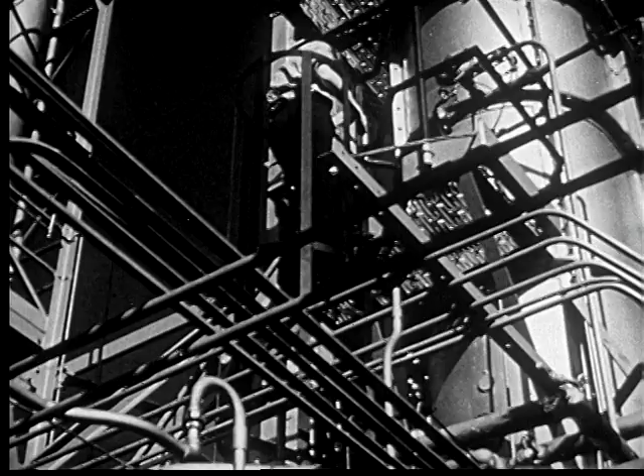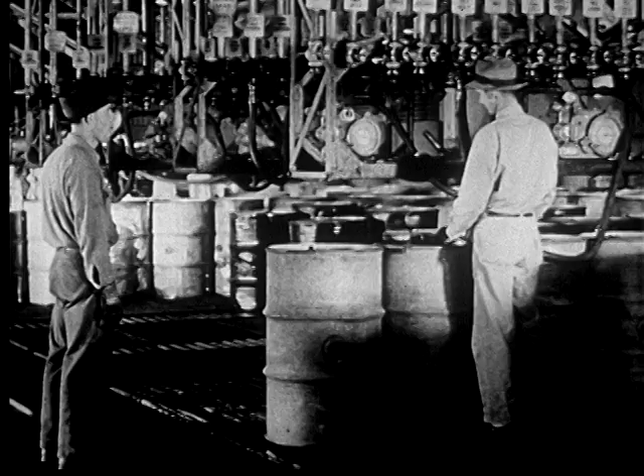Gasoline. Powerful stuff. Modern magic. Our lives, our business, our cities are patterned on motor transportation which gasoline has made possible.

Do you realize what gasoline means to this country? It has added a new freedom to our lives, the freedom of movement, of individual transportation, anywhere, anytime, for everybody in America.

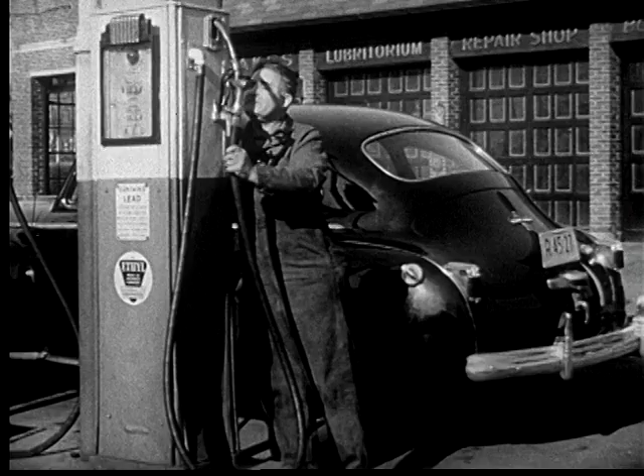And those who make and sell gasoline perform a service, not only to their communities, but to the whole country. But most people just don't realize how much hard work, knowledge, and money it takes before gasoline can come out of a pump and into the tank of an automobile.

First, there is the search to find the crude oil that's needed to make gasoline, and that takes plenty of study and special training. They send out crews to make surveys of territories that seem promising, just like prospecting for gold in the old days. Only these men are scientists.

They sink test holes and use super-sensitive instruments to find out what the Earth is like far below the surface. If the experts decide the results show the possibility of oil, they are ready for the next step.

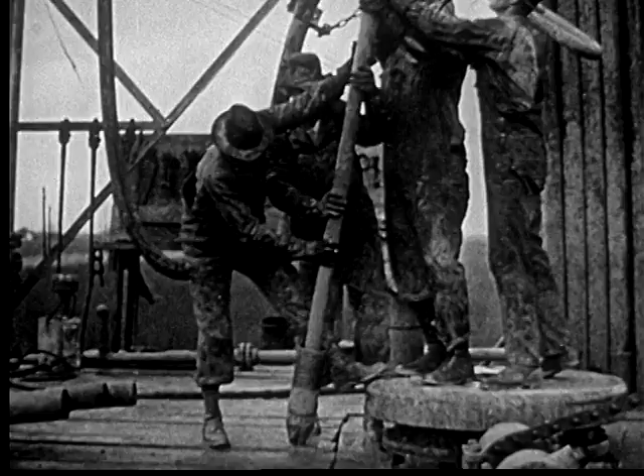Usually, they first drill a hole to get actual samples of the Earth itself, cores that show exactly what the Earth is like at different levels. The oil engineers can tell if these samples come from a place that contains crude oil, how good it is, and how much there is.

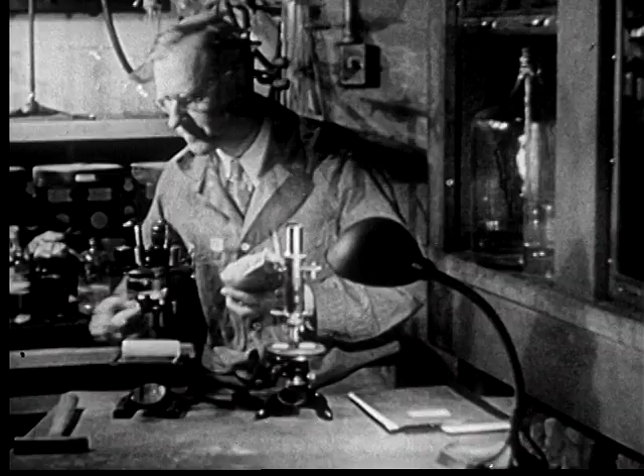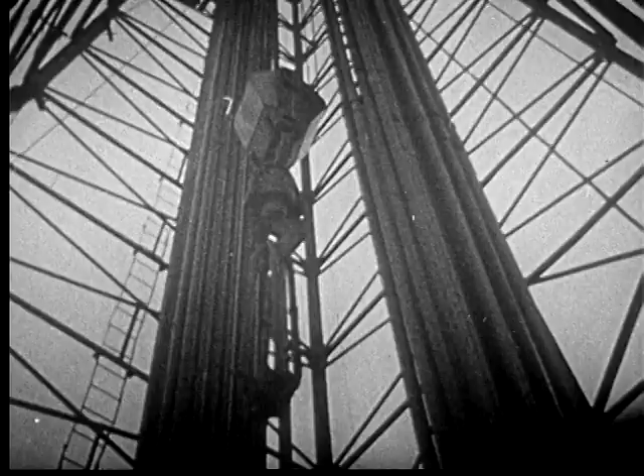Then another big, tough, expensive job gets underway. Clearing the land for drilling, maybe even building roads through wild, rough country. Oil drilling goes on all the time. Thousands of new wells are drilled every year. And because of the scientific way they go about it today, over half of these new wells deliver oil.

Next, there's the job of getting this crude oil from the wells to the refineries. A lot of it travels through pipes, thousands of miles of pipes. Some pipelines extend halfway across the country. And plenty of crude oil is carried in tankers.

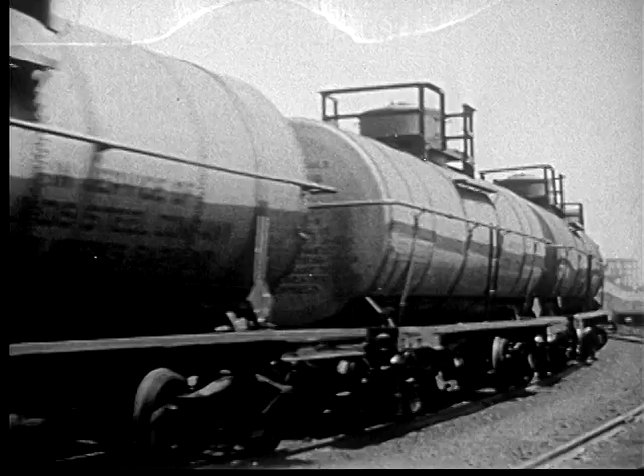They also transport finished gasoline to every part of the world. These tankers form one of the biggest merchant fleets we have. And the railroads carry oil from the gathering tanks to the refineries, and then gasoline from the refineries to distribution points all over America.

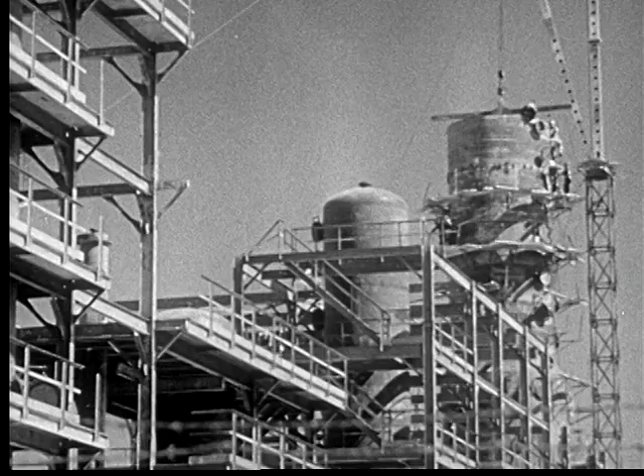The process of refining crude oil into gasoline and other products is another big part of a big industry. It takes millions and millions of dollars worth of equipment to turn out finished petroleum products.

It's a complicated process, but not at all difficult to understand when you realize that every drop of crude oil is a mixture of many small particles or molecules. They're called hydrocarbons because they are compounds containing only hydrogen and carbon. The molecules vary in relative size and weight.

The large, heavy molecules are found in the heavier oils, the fuel oils, lubricating oils, tar, asphalt, and so on. In what you might call the medium sizes, you find smaller and lighter molecules. And these are what are used for gasoline and kerosene and similar products. The very small and very light molecules are the natural gases.

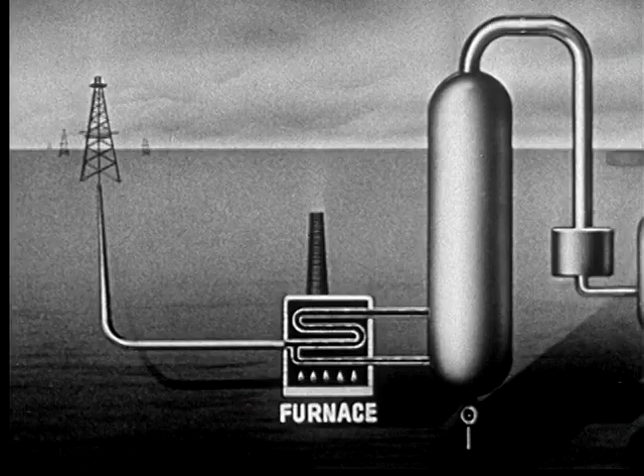As it comes from the well, the crude oil contains molecules of all sizes. The first step is to separate them. The crude oil is heated in a furnace, and the hot oil is pumped into a fractionating tower. The proper temperature is maintained in the tower by recirculating part of the oil through the furnace.

The heavy molecules in liquid form concentrate at the bottom of the tower and are drawn off for use as heavy oils. The lighter molecules vaporize, and with the natural gases, move to the top of the column.

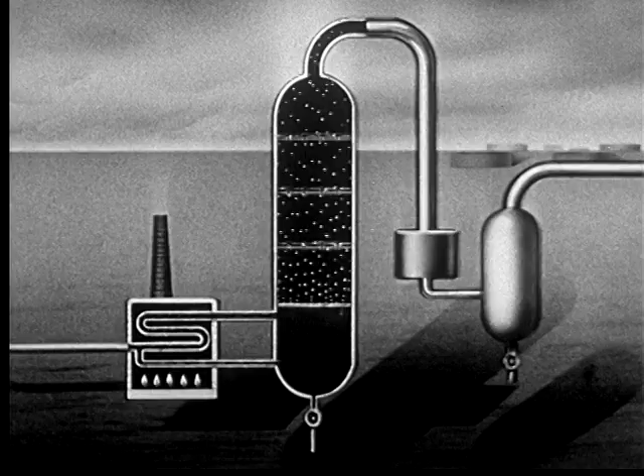This mixture of gases and oil vapors flows into a condenser. The vapors condense into liquid gasoline. The next step is to separate the gases from the gasoline. This is done in a second fractionating tower.

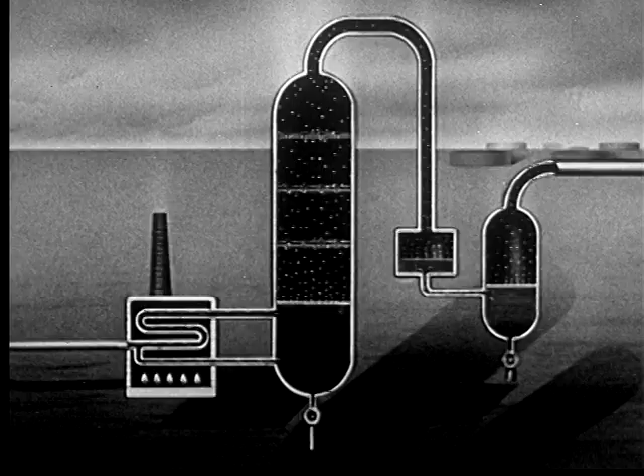The gases move to the top of the tower and are drawn off. The liquid gasoline concentrates at the bottom of the tower. This is what we call straight-run gasoline. In the early days of the automobile, this straight run was the only kind of gasoline we had.

But as public demand increased, new ways had to be found to get more gasoline from a given amount of crude oil. So the oil industry developed what is called the thermal cracking process. Certain of the larger molecules of heavy oil are literally cracked into smaller molecules in or near the gasoline range.

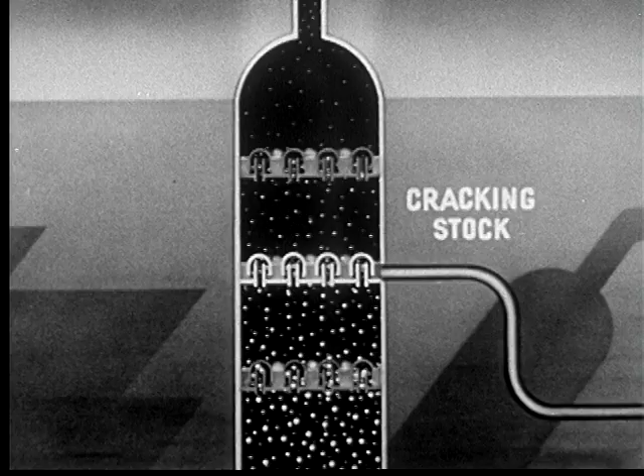In the fractionating tower, the oil molecules tend to collect at various levels according to their size. That's why they call it a fractionating tower. The molecules collect in groups or fractions. This makes it easy to take off the group of medium weight molecules that are best suited for use as cracking stock. These molecules are piped to a thermal cracking furnace, where by heat and pressure, they are cracked into smaller molecules.

At the same time, a lot of other things happen to the chemical structure of the molecules, and a kind of synthetic crude oil results, with molecules of all sizes, but almost half of them are in the gasoline range.

This goes into a flash tower where the smaller molecules vaporize. Those that are too heavy are drawn off and used as asphalt, coke, tar, and so on. The lighter molecules move to the top of the tower and then to a condenser, where they again become liquid.

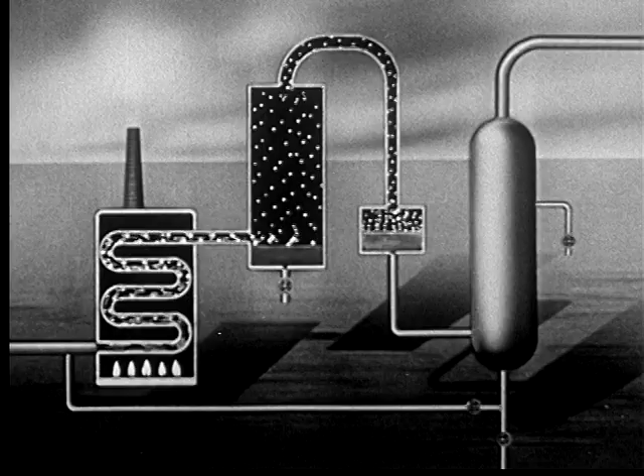To separate them, they go to another fractionating tower. The heavier oil collects at the bottom and is drawn off as cracked fuel oil. The lighter molecules move toward the top, condense, and are taken off at their proper level as thermally cracked gasoline. The gases formed during the cracking process move to the extreme top of the tower and are piped off.

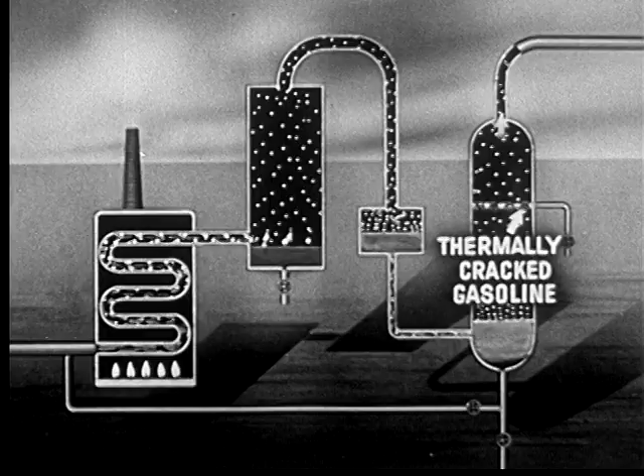Also, to obtain more gasoline, some of the cracked fuel oil is piped back to the thermal cracking furnace and goes through a second cracking process, again increasing the amount of gasoline obtained from a given quantity of crude oil.

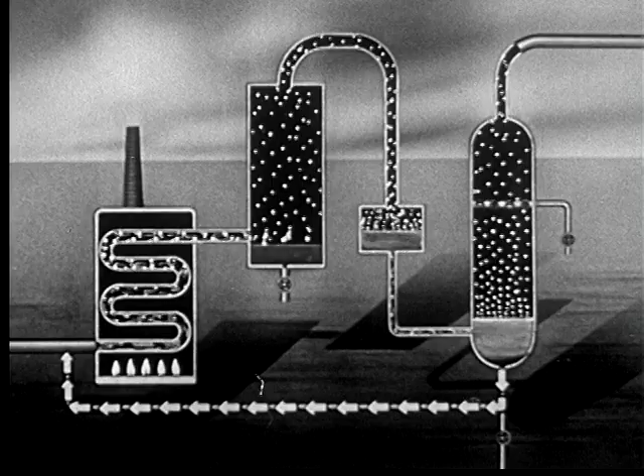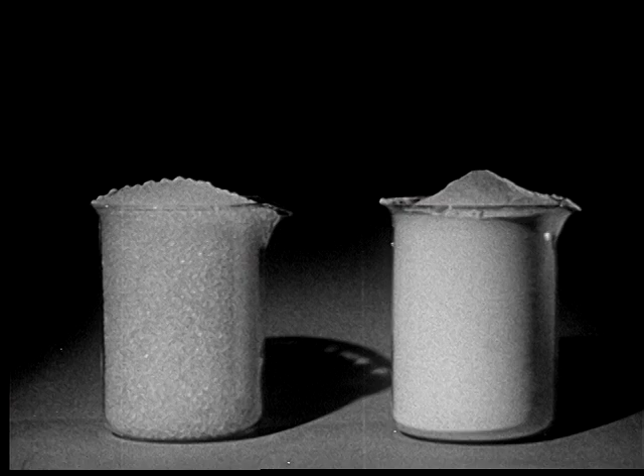In recent years, the industry has tremendously expanded a comparatively new cracking process called catalytic cracking. A catalyst is a substance which causes a desired reaction to take place without being affected itself. In cracking gasoline, the catalyst is in the form of beads or a fine powder-like material.

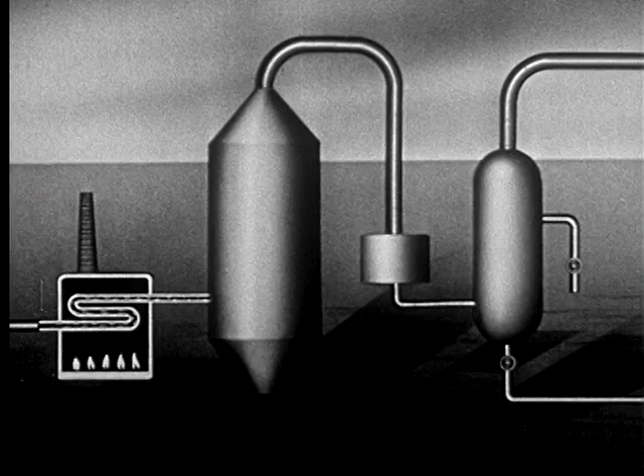In this process, heavier molecules of oil below the gasoline range are piped into a furnace and heated. The hot oil vapors then go into the catalyst tower, where they contact the catalyst. This not only cracks the molecules down to smaller size, but changes their chemical structure to make them suitable for gasoline.

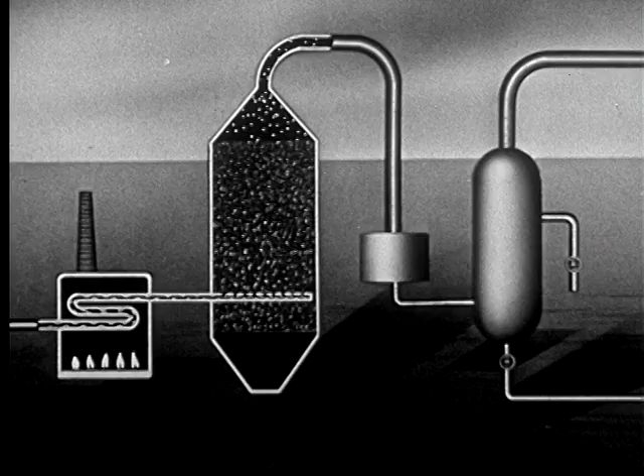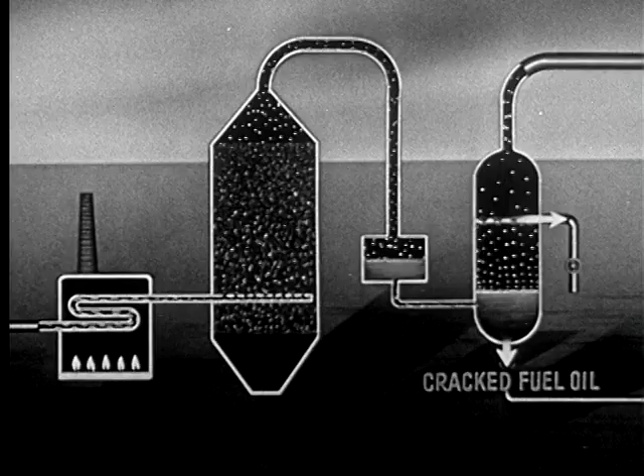These smaller molecules then go to a condenser, where they become liquid, and then to a fractionating tower. Again, the liquid that is too heavy for gasoline collects at the bottom and is drawn off as cracked fuel oil. Gasoline is drawn off at its proper level, and this is what we call catalytically cracked gasoline.

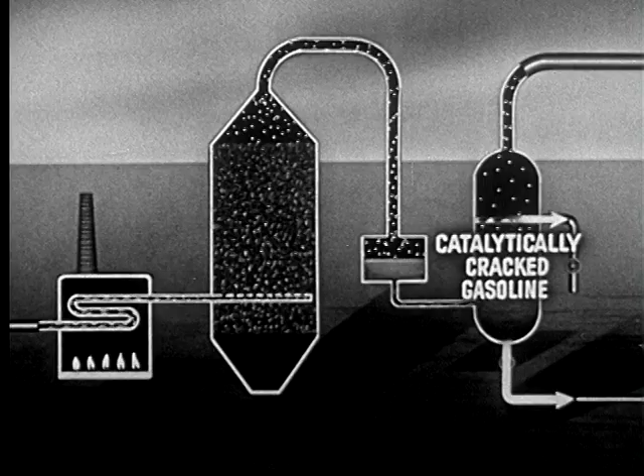In many operations, even more gasoline is obtained by sending some of the catalytically cracked fuel oil into the thermal cracking process. The gases, as usual, collect at the top and are piped off.

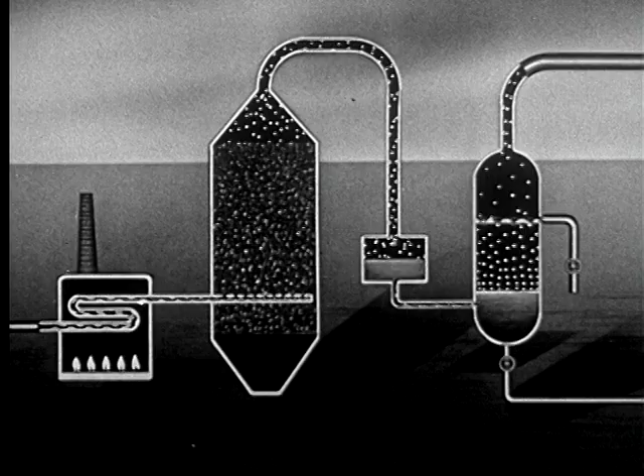In every process, gases have been produced. These used to be burned away as waste or used as gas. But to conserve our natural resources and to obtain the largest possible amount of gasoline from the crude oil, the oil industry discovered how to make gasoline from some of these gases too, by a process of polymerization.

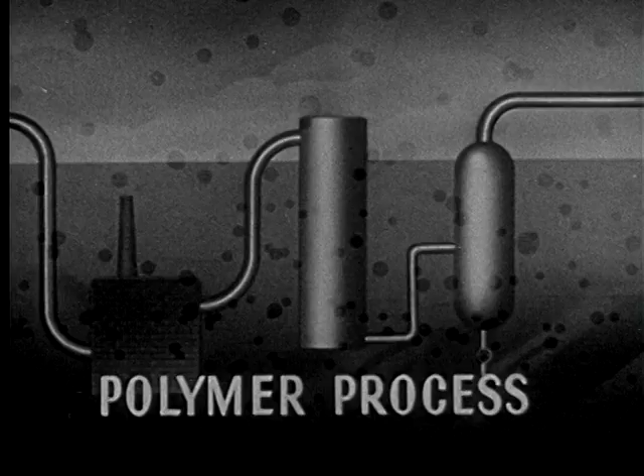This is just the reverse of cracking. Polymerization simply means combining very small molecules to form larger molecules. So the smaller molecules that are lighter than gasoline are combined into larger molecules from which gasoline can be made.

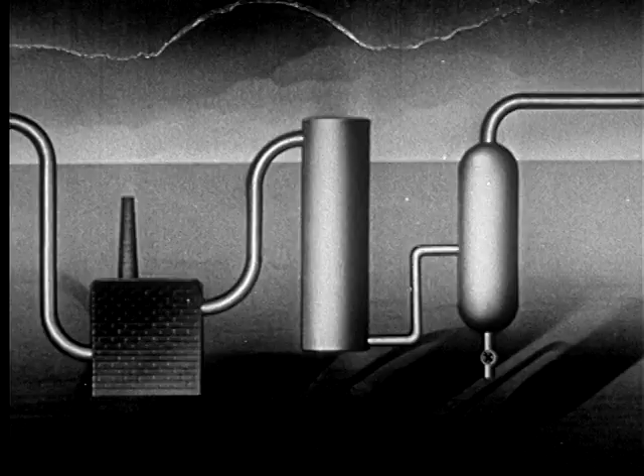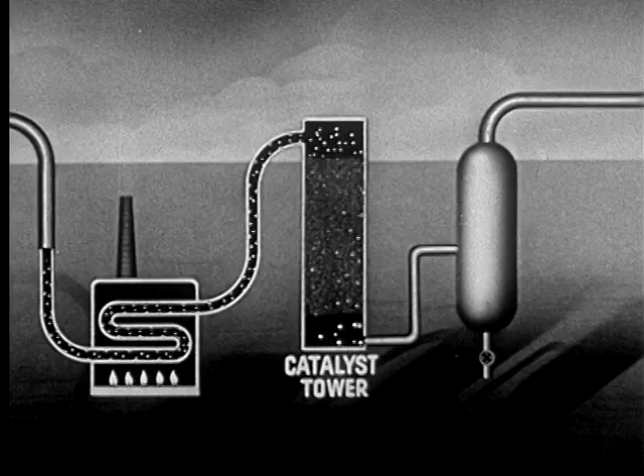The gas is piped into a furnace and heated. The hot gas goes to a catalyst tower. By contact with a suitable catalyst, usually phosphoric acid, a chemical reaction occurs which causes the molecules to unite and form larger molecules. These larger molecules go into a fractionating tower.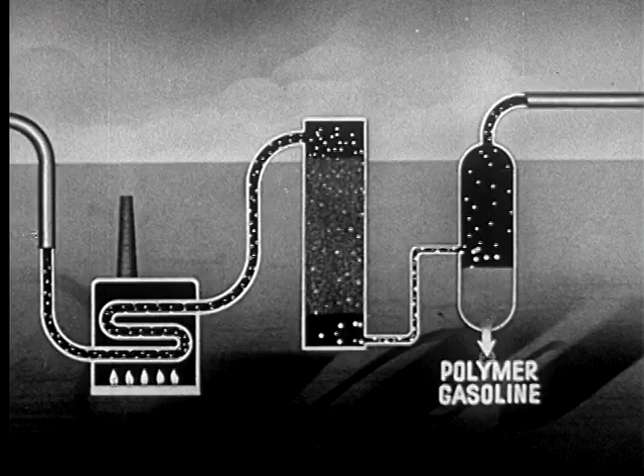Those in the gasoline range condense to liquid, and this is drawn off as polymer gasoline. Those that are still too light are drawn off the top as fuel gas.

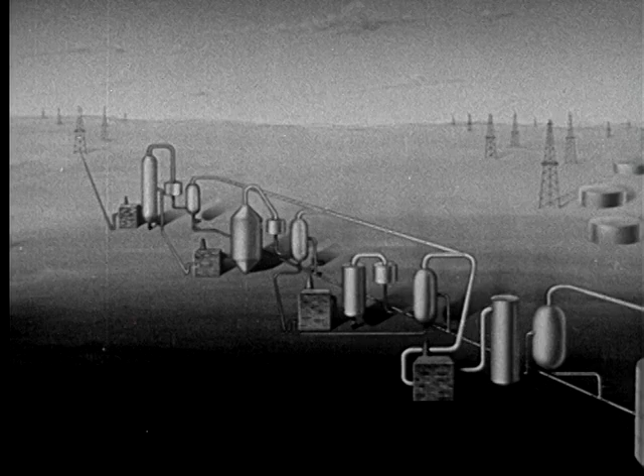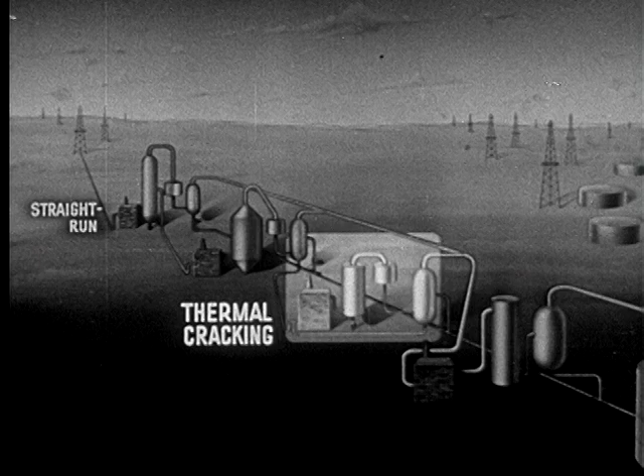So we have four main types of gasoline refining processes. Straight run, in which gasoline is vaporized from crude oil by simple heating. Thermal cracking, in which heat and pressure are used to split heavy oil molecules into smaller molecules suitable for gasoline. Catalytic cracking, in which a catalyst is used to split heavier oil molecules. And the polymer process, in which small gas molecules are combined to form larger molecules and condensed to liquid.

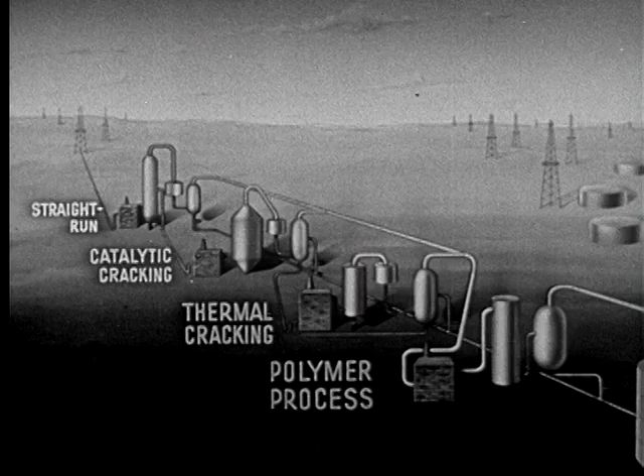Certain of these processes produce gasolines of superior anti-knock quality. Gasolines from other processes can be stepped up by blending with materials such as alkylate or benzol. Most refiners, however, find it advantageous to add ethyl brand of anti-knock compound to their gasolines. It ensures high anti-knock quality for their entire output.

For more than 20 years, ethyl brand of anti-knock compound has helped the petroleum industry to bring out better and better gasoline. And during these past years, you have seen what better gasoline has meant in producing better automobiles with engines that give increasingly better power and better performance.

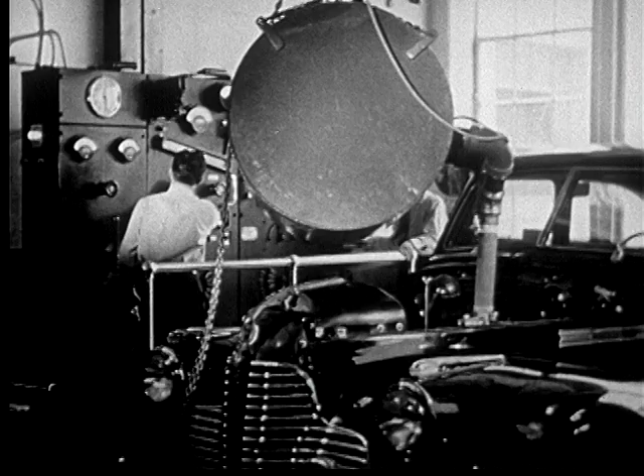This progress is the result of the constant endeavor of the oil and automotive companies to fit engines to fuels and fuels to engines, an endeavor in which ethyl research engineers, today as in years past, are working in close cooperation with both industries.

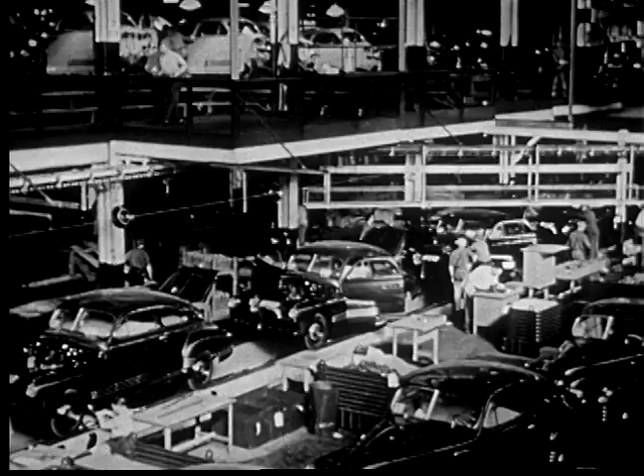And as our progressive American oil industry, with research and ingenuity, continues to improve gasoline, automotive engineers will design new and better engines capable of converting this extra available power into greater efficiency, more economy, faster, smoother, more resilient power on the highway, on the farm, in the air, and on the water.

For this is the age of motor transportation, with gasoline for everybody.